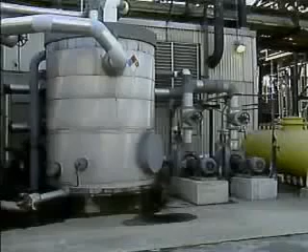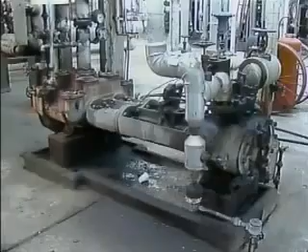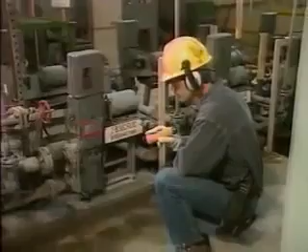Industrial facilities depend on pumps to keep fluids flowing through piping. One basic type of pump is called a positive displacement pump. There are many different kinds of positive displacement pumps, and they move fluid in different ways. To keep the positive displacement pumps in your facility working properly, you need to have a basic understanding of how they operate and how to perform maintenance on them.

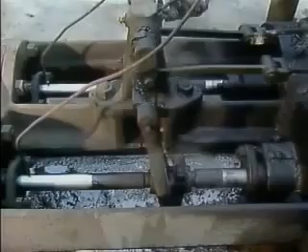A reciprocating positive displacement pump uses the back and forth, or reciprocating, movement of components such as pistons, plungers, or diaphragms to move fluid. One common type of reciprocating pump is the piston pump, represented here. Its main components are a cylinder, which is located inside a casing, a piston, a connecting rod, and two valves: a discharge valve and a suction valve.

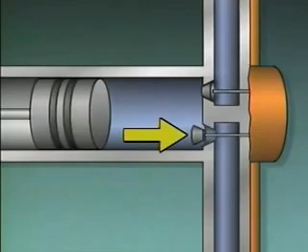The connecting rod connects the piston to devices that move the piston back and forth. When the piston moves back on the suction stroke, it reduces the pressure inside the cylinder. The reduced pressure closes the discharge valve, opens the suction valve, and draws fluid into the cylinder. When the piston moves forward on the discharge stroke, it exerts a force on the fluid that increases its pressure. The increased pressure closes the suction valve, opens the discharge valve, and pushes the fluid out of the pump. At the end of the second stroke, the piston is in its initial position, and the cycle begins again.

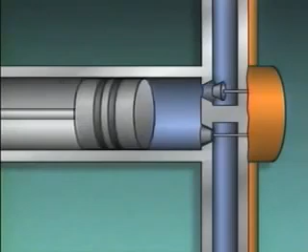Basically, the piston draws fluid into the cylinder and then positively displaces it. In other words, the piston takes the place of the fluid. The pressure of the piston pressing against the fluid gives the fluid the pressure it needs to move through the discharge piping.

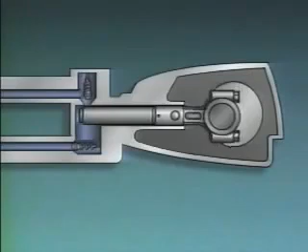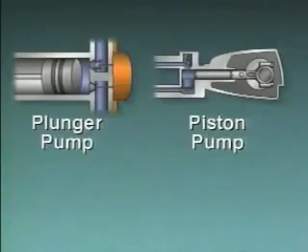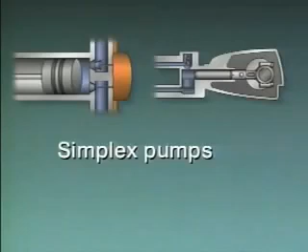The plunger pump and the piston pump that we've looked at are both simplex pumps. They're simplex pumps because they each have only one piston or plunger. A simplex pump has a limited capacity. These pumps are single-acting pumps as well. That's because fluid is admitted on one part of the reciprocating movement and discharged on the other part. This creates a very uneven pumping action, and the fluid is discharged in spurts.

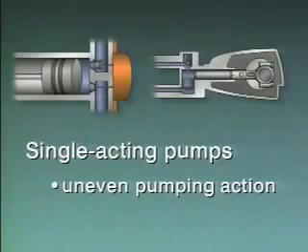One way to help even out the pumping action associated with a single-acting pump is to use a double-acting pump. Double-acting pumps are designed so that each part of the reciprocating movement acts to both draw fluid into the pump and force fluid out of the pump. Here's an illustration of a simplex double-acting piston pump. It has a cylinder that contains a single piston, a discharge manifold that contains two discharge valves, and a suction manifold that contains two suction valves.

When the piston moves to the left, the increased pressure on the left side closes the suction valve and opens the discharge valve on that side. At the same time, the reduced pressure on the right side closes the discharge valve and opens the suction valve on the right side. On the next stroke, the piston moves to the right, reducing the pressure on the left side of the piston and increasing the pressure on the right side. This closes the discharge valve and opens the suction valve on the left side, and opens the discharge valve and closes the suction valve on the right side.

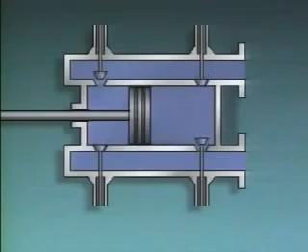So during each stroke of a double-acting pump, fluid is forced out. The result is a smoother, more continuous discharge than you get from a single-acting pump.

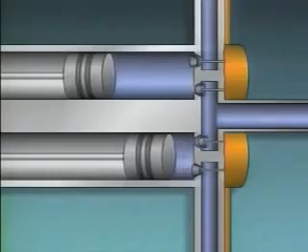To overcome the capacity limitation of a pump that has a single piston or a single plunger, some pumps have two pistons or two plungers. These pumps are called duplex pumps. This duplex pump has two pistons that alternate their movements. It operates like two single-piston, or simplex, pumps that are side by side. Each portion of a duplex pump can be double-acting, as in this example, or single-acting. In either case, the strokes are mechanically timed to provide the smoothest possible discharge.